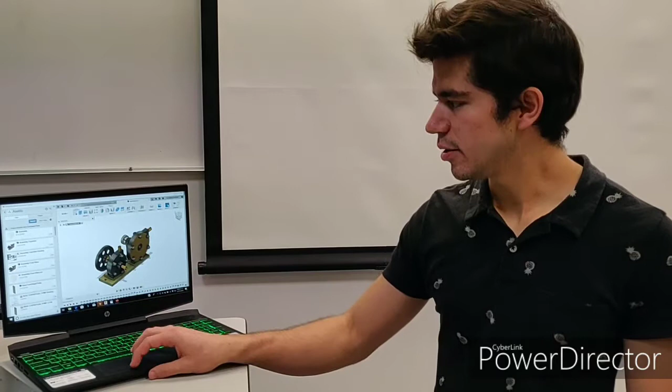Now I'm going to present the machine that we made. Here on this carpet we put all the assemblies and all the pieces that were needed to make the final assembly, and the final result was this one.

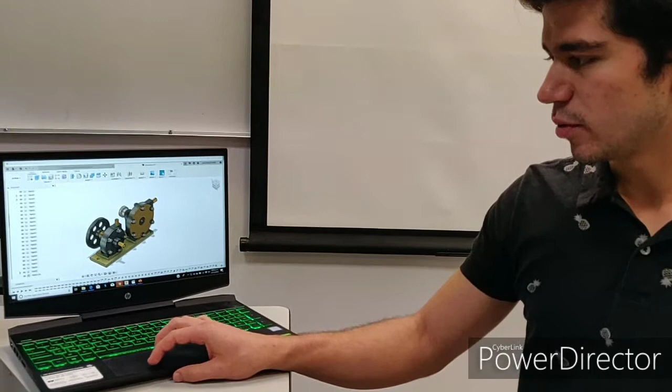A functional machine, very aesthetic, with a lot of motion links and a lot of pieces too. Here we can see the joints that we made, more than 50 of them, because we used a lot of screws and nuts, and some motion links to make all of these parts dependent. If I move something from here, everything is going to move.

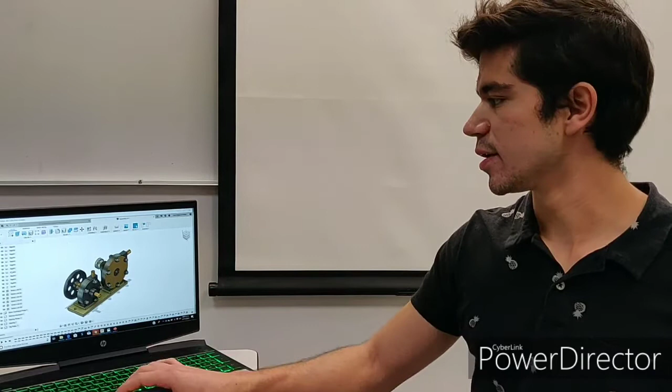The way it works, in simple terms: gas enters the turbine. This turbine starts to move, and the shaft connected to the turbine makes the little pulley move. This system is connected by a band that goes to the big pulley, and this one moves another system that we have inside this housing. Basically, that's how it works.

Now you are going to see a video where you can see how it functions.

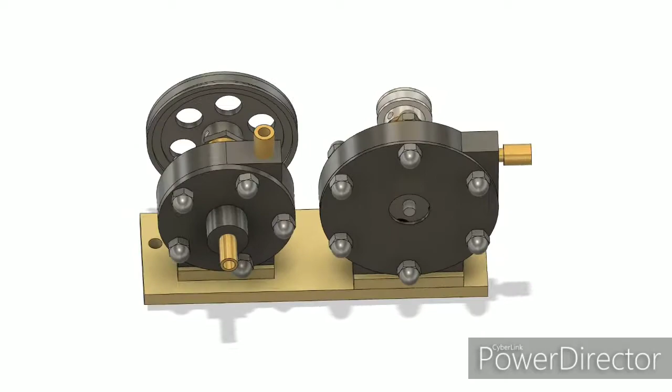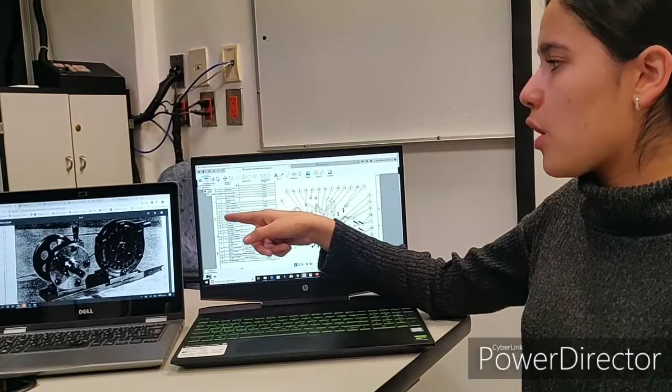Here we have the exploded view, which explains the position of each component. In this table you can see the quantity, the name of the component, the number of the component, some comments, and the type of material.

Here we have the render to show the machine in a more realistic way. On this side we have the orthogonal views that show the top view and the bottom view, and the centrifugal pump section view and the turbine section view.

On this page we have the poster of each component with its name, and at the end we have the screws and nuts that we used and their quantity.

I was in charge of the technical drawings and putting it all together in the posters with the screws and nuts. One of my difficulties was figuring out the depth of thread for each hole.

I was in charge of the assembly, the video, and the exploded views. The difficulties I had were that the assembly had a lot of pieces, which made the task a little difficult, and also in the exploded view it was very complex to make all the pieces visible while keeping it aesthetic.

I was in charge of doing all the views in render, and also I had to create some of the parts of the machine.